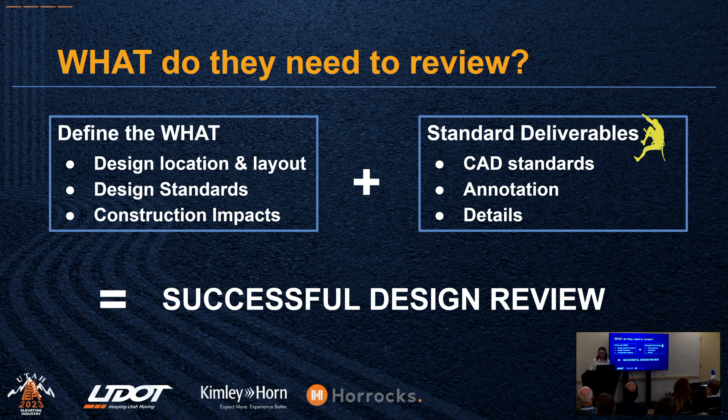And now, as we get into the how for design review, this is where we're going to look at these 4 platforms: the native CAD software, PDF roll plots or scroll plots, 3D review platforms, and GIS. And so Ariel's going to dive into some native CAD software.

Thank you. Yeah, we can clap. Let's clap. Yeah. Okay, thanks, Allie. That was awesome. So like Allie, thank you. She deserves it.

Now we're going to talk about the how. How do we consume the model, view the model, interact with it on a project where we don't have a traditional PDF plan set? And I just want to point out, this is what we've done in Utah so far. These are some things we've tested.

That doesn't mean it's the best way. We might say something didn't work for us, and then you might say, oh my gosh, we're doing that now, and it's amazing. Every agency has different constraints, different needs, so just keep that in mind as we go through this.

Also, most of the demos I'll be showing have to do with Bentley products because we use that most, but we also have done an Autodesk product, and I just want to say Autodesk and Bentley and Esri, that Derek will talk about at the end, have been super supportive and really helpful as vendors as we've tried to work through this process. So I think it's important to take advantage of the vendors. They want to help you. Keep that in mind too.

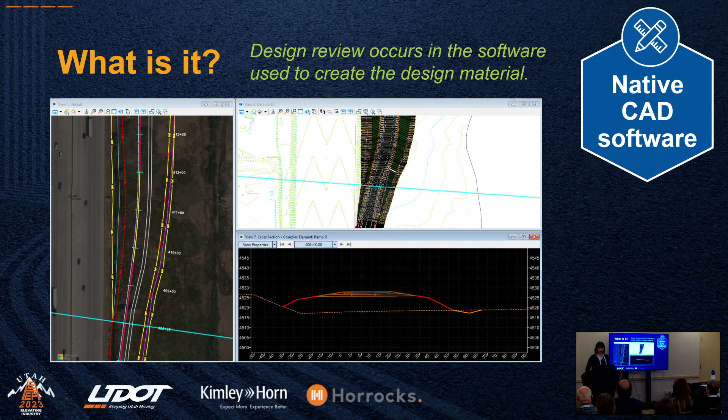So the first one that we'll talk about is native CAD software. This is basically anywhere where the designer is originating design content, data for the project. In this one, it's going to be OpenRoads Designer or MicroStation, but this could be Civil 3D, it could be ProStructures, wherever you're generating the design. Make sure we can get this full screen.

Okay, so first, if you're not familiar with CAD, this is OpenRoads Designer. This is what it looks like, just to get an idea of it. You can see there's a lot going on. There's a bunch of tools. There's a lot of colors, a lot of different things. Top left, I have a 3D view shown.

If you're familiar with CAD, that might look really great. You might be like, oh yeah, I know what's a road, I know what's a pipe. If you're not, you might think it looks like a nightmare. So that will come up on who this works well for. It depends a lot on your background.

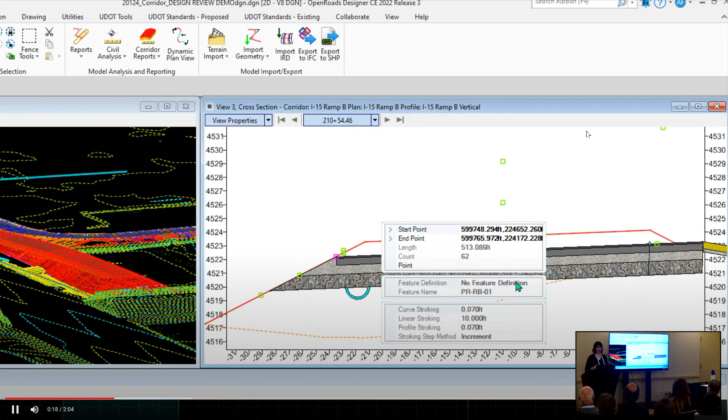Here I've got a cross-section view, so since I'm in the CAD software where the design originated, it's really easy to get different views, to click on things. Here I just clicked on a pipe. I can see the name of the pipe. I can pull a ton of different information. Same thing down at the bottom. I have a vertical center line for a roadway. I can click on that and pull up a bunch of design data on that vertical center line.

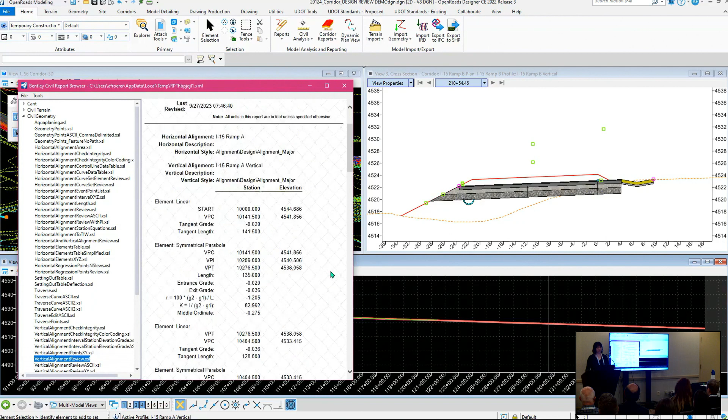So a lot of people might not need this, but there is a ton of data in here and a lot of different options. So this is something that comes in handy typically for the engineer of record, maybe for owner acceptance, QA, QC. All of that data can be really helpful. For a lot of other people, it's not going to matter.

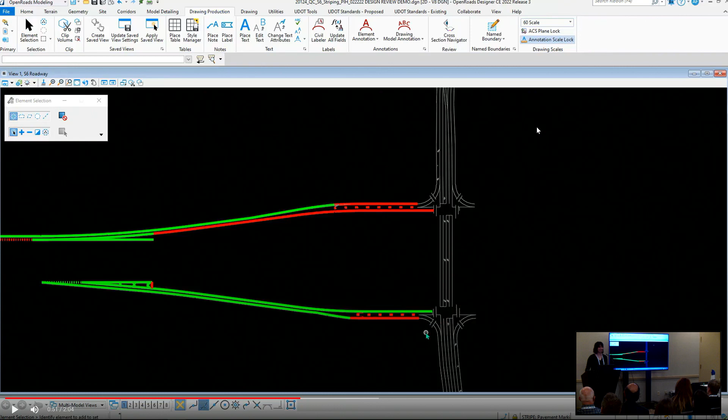A different way that we've used the native CAD software in Utah is specifically for QA/QC and tracking QA/QC through the design process. This is on a project that I think Horrocks and Kimley-Horn have worked on, that Nicole has a presentation on later.

But this is in ORD, a way that we tracked the QA/QC. I zoomed in here to some stripes, you can see we have some colors that turned on. That's something we've set up to indicate what has been checked and what hasn't, based on attached data attributes in ORD or MicroStation, called item types. There's basically a bunch of text attributes that say when something was checked, the date and time, whatever comments were added.

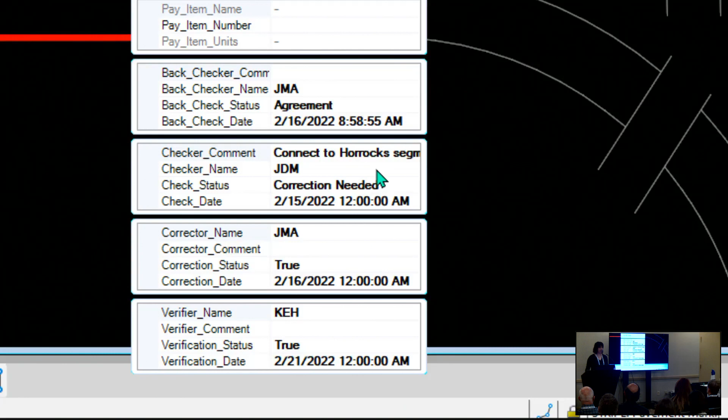So there's a lot of data, and that's up to the designer to manage throughout the project. It can be a little bit tricky once you get into a big project with a lot of files to manage all this, but it's an option.

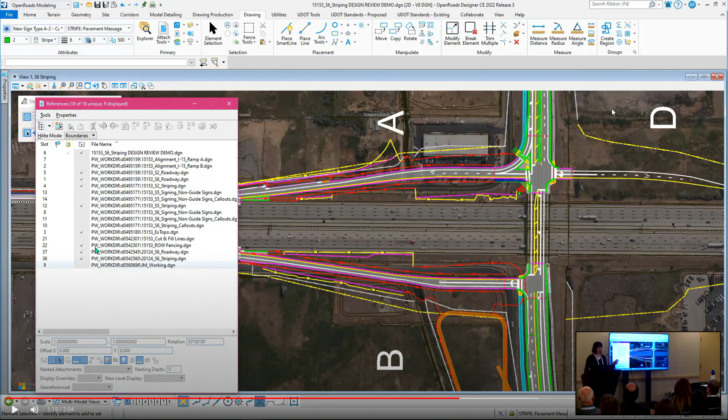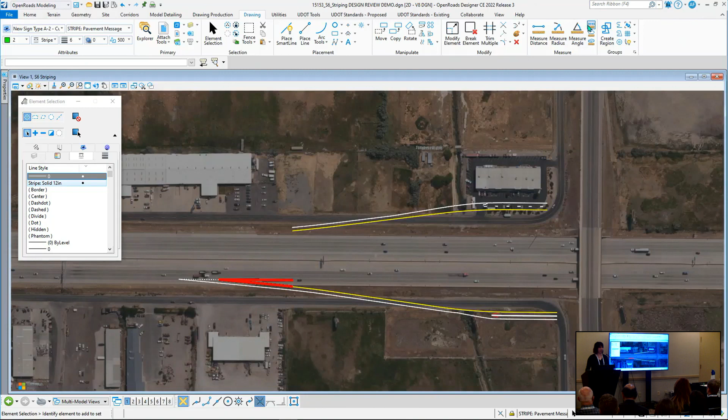The last thing we've been utilizing this native CAD software for is that estimating portion, pretty much the project team estimate, not so much in bidding, but during the design process. It's really easy to customize what you're seeing, pull up anything you need out of the native CAD software. Here I'm filtering down to the one single stripe type I'm interested in, and I can very quickly measure that stripe, see what I have in my file, do this on multiple files, pull pretty much any data that I want.

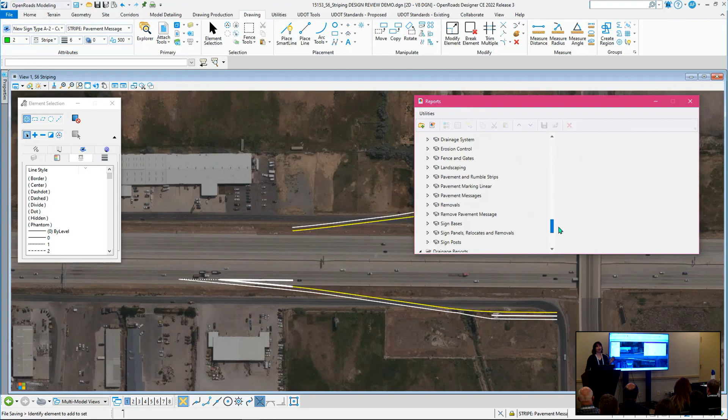We also use reports a lot in OpenRoads Designer in the CAD, and again that's just another way to quickly get a bunch of data. Right now I'm pulling up a striping report that's going to list out the location and all of the data attributes for my pavement marking. So you can see there I've got station offset - it's probably really small, but it's a bunch of data about all the stripes in the file. It's easy to get to if you know what you're doing in CAD.

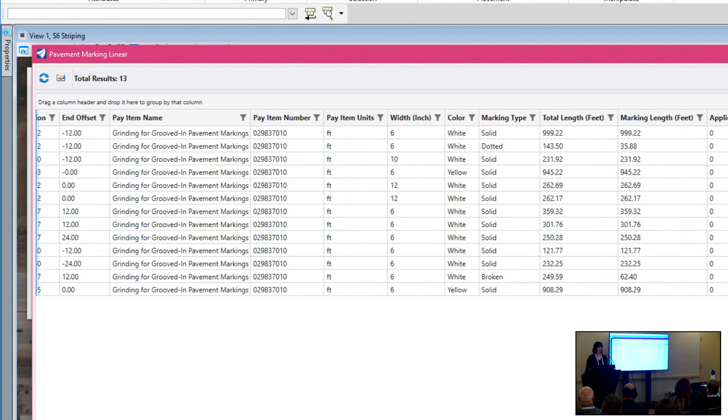Probably gonna have to... there we go. Whoops, and of course I've exited full screen.

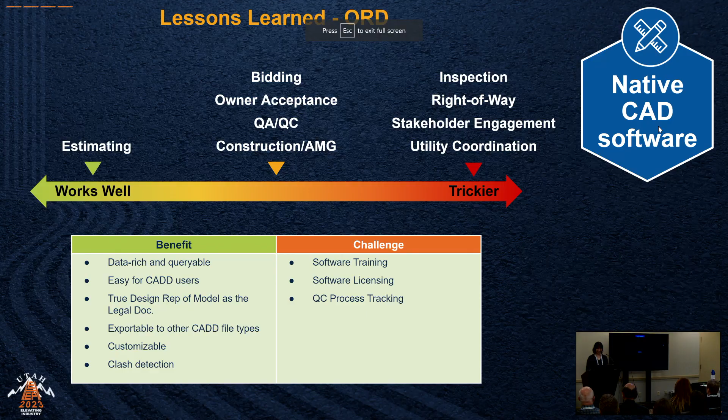There we go. Okay, so on that native CAD software, as you can see, it's complicated. Typically it's pretty expensive relative to like a PDF, and so this works well for anyone who has a CAD background. For third parties, for the contractor, it can be a little bit trickier to get into. It's also, what we use in design is usually not the same software that's used out in construction, so there's usually translation.

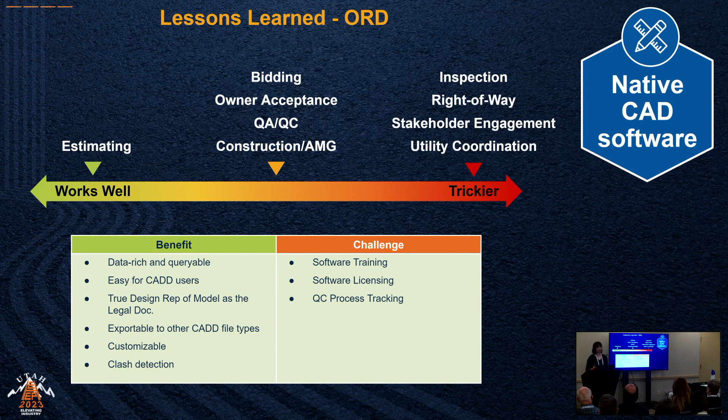So it's not maybe the perfect model for construction, and it's definitely hasn't worked great when we've tried to communicate out to like a utility. Sometimes they'll take CAD files, sometimes they won't, but like the public, this is basically useless - they're not gonna be able to get in there. So that was the native CAD software.

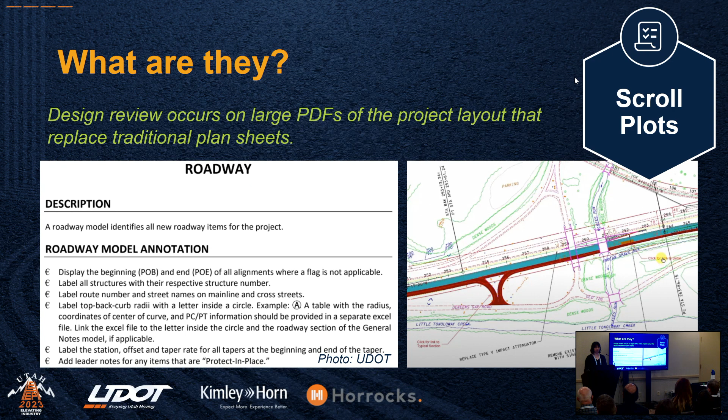The second of the four tools or methods that we've used in Utah pretty regularly on these digital delivery projects is a scroll plot. This is sometimes called a roll plot, but it's basically a giant PDF with the whole project shown, or sometimes just a component of the design shown. How we've used them, we don't put as much information as a typical plan set would have.

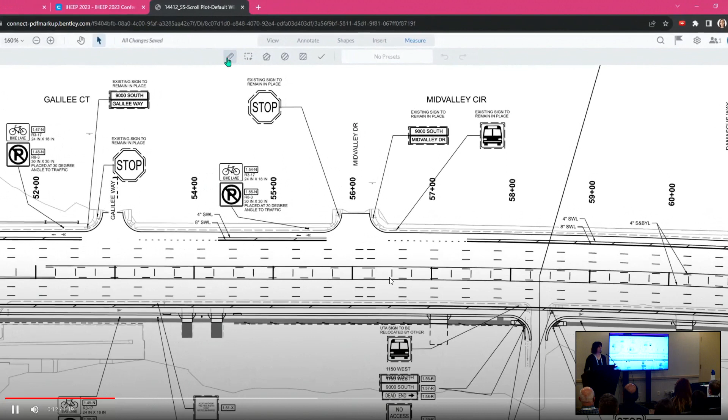So I'm gonna go ahead and jump in and show one that we've used. This is one of our scroll plots from a digital delivery project. Right now I'm in Bentley's Cloud PDF viewer, but basically Adobe, Bluebeam, any PDF viewer is gonna give you pretty similar options. Like all of those other softwares, you can usually measure things just in 2D - you can get areas, point quantities. Here I'm getting a distance.

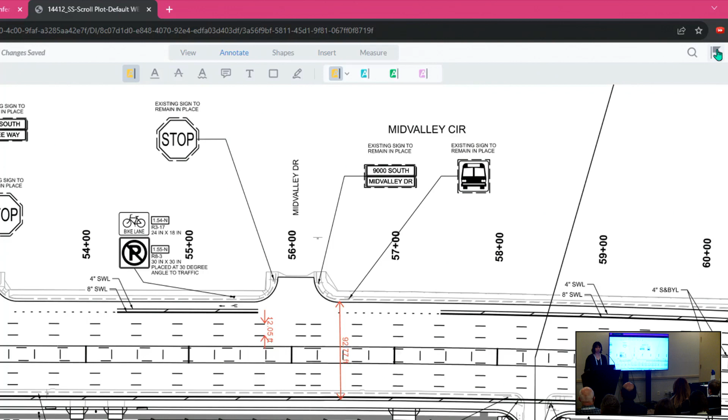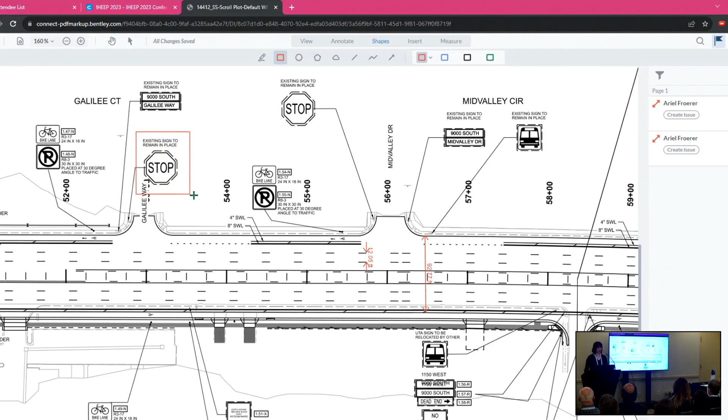So this is also used in bidding pretty often for that 2D data specifically. You also have pretty good options for QA/QC since so many people are familiar with PDFs, and this is pretty close to what we have on a typical project. Usually folks are comfortable coming into a PDF. Here I'm making an issue - most PDF softwares will let you make issues and easily annotate what you're looking at. So that's something folks are familiar with, and having it in this digital format does make it a little bit easier to see the whole project, see all the issues that are happening, and see what other disciplines are up to.

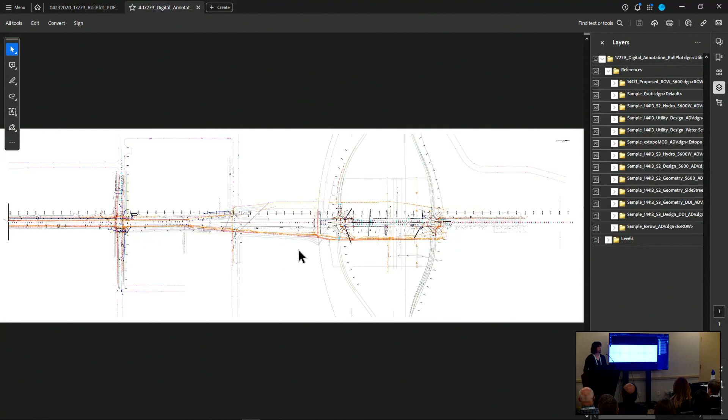This is just one other kind of view of how we've used a scroll plot. This one's a little bit more detailed. You can see it looks a little bit more like CAD. There's colors turned on, there's more information. We also have embedded the layers in this case. So this gives you a little bit more info. You can kind of turn things on and off to customize what you're looking at.

But again, it's just going to be 2D, and there's not really that extra data. If you wanted to click on a pipe or see a pipe profile, that's something that would have to be provided.

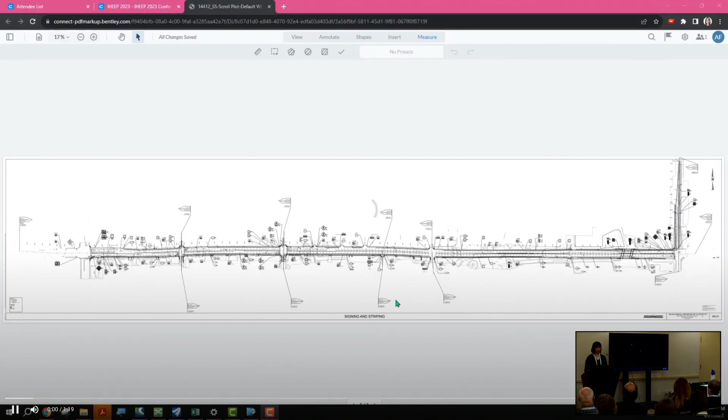So scroll plots, since this is pretty much closest to what we're used to with PDF plan sets, this works great for anyone like right-of-way or utility coordination, since they're used to getting a PDF. We also, on most of our digital delivery projects, are providing these during bidding. That's something that's kind of been requested. We've tried a few times to not have the scroll plots, but so many contractors and subcontractors are used to consuming a PDF that it's just easier to provide some type of PDF. Again, it's usually really stripped down. It doesn't have all the detail we'd have on a traditional project, but it's still available during bidding.

Oh my goodness, sorry, I'm going to have to get water. Okay, I think we'll make it. It's over there, I have water over here. Oh, don't make Allie get it. Oh my goodness, I'm sorry. No, I'll go. Thank you, everyone. Take a moment, take a breath. She's got a few more, so. I can basically run now. I'm good, yeah, okay. Okay, thank you. That's presenter mistake 101. Don't leave your water on the other side of the room.

So on those scroll plots, because it doesn't have that extra data, it's kind of limited on what we can use it for owner acceptance. Some things, like you saw the signing, that's probably enough info. Drainage, a 2D view might not be everything that you need. Lastly, because there's not like earthwork quantities or anything readily available, it's not as great for estimating or that machine guidance.

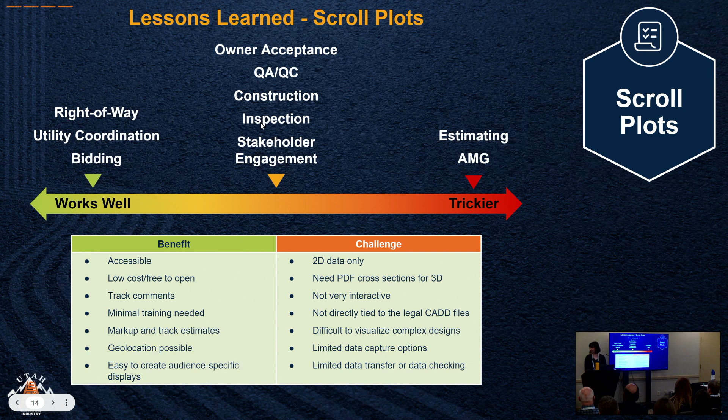So the third and the last one that I'll talk about before passing it to Derek is a 3D review platform. This is basically either like an app or a web app that can pull in or use the project models all at once, but it doesn't actually store the project models, or it stores kind of a version of them, but it's not the original CAD file.

They can also usually hold supporting documents like PDFs. So the ones that we've used mostly are like Bentley's iTwin Review Online. I think that name changes sometimes. Synchro out in the field, and like BIM 360, or I think Autodesk Construction Cloud is kind of the new iteration of that. So this is something where you can view the CAD files, but it's not the original CAD files in their native environment.

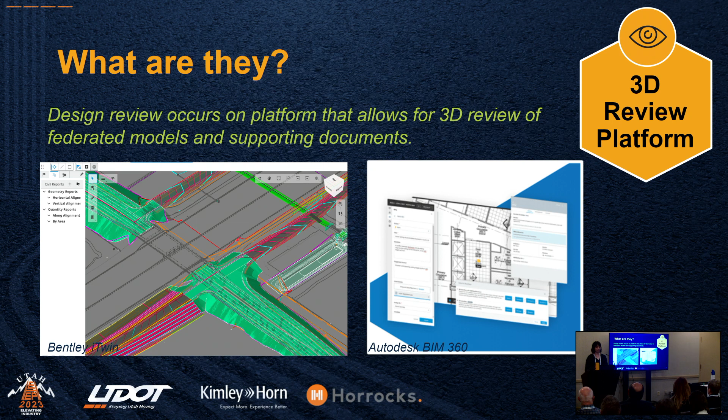Okay, so this that I pulled up here, this is from Bentley's Cloud Design Review that we've used on a couple of projects now. You can see it looks pretty much like CAD. There's a lot of data there. There's 3D data, I've got a cross section. Kind of the big difference between this and the native CAD is I don't have nearly as many tools. There's a lot less that can be done. But that also makes it easier for someone who's not familiar with CAD to kind of come in and learn a little bit faster.

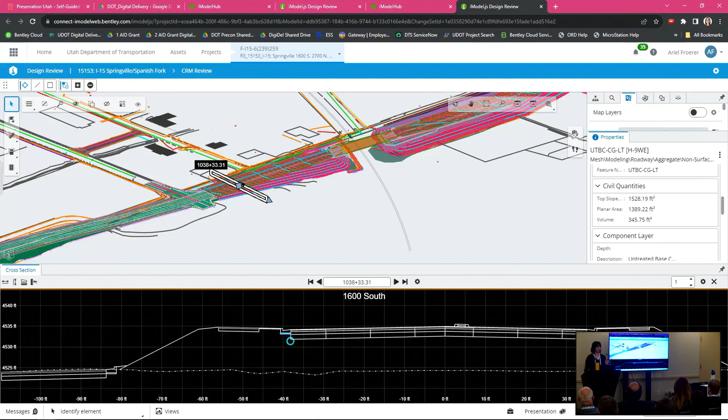You also have the option to kind of click on things. There, it's really small, but I'm just pulling up some project information on a specific element. So you can query the data in here.

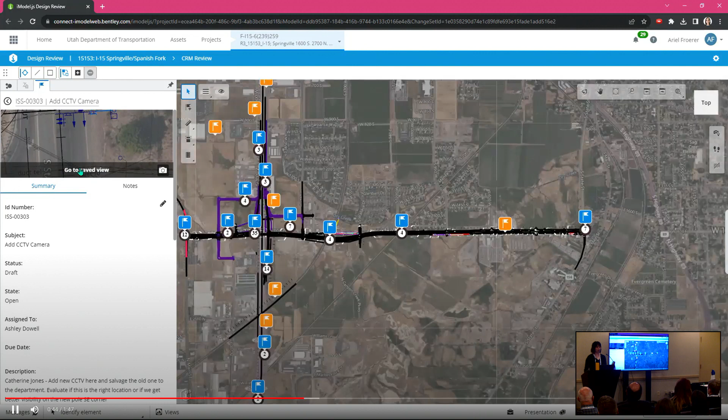And this will jump to the same, this is the same web application, but I'm out in a 2D view. You can see I'm tracking all the project issues, and I can easily see what's happening on the project. So this is pretty helpful for owner acceptance, getting a bunch of people to jump in, look at the project, see what they're concerned about, leave their comments, and then the designers can actually address them. So here, if I click on a specific comment, I can just see exactly what that person was looking at when they made that comment.

This also can be used for QA/QC, although the reason we haven't used it as much for that is it's not the actual CAD file, which on our digital delivery projects is the legal document. So usually the engineer of record at some point wants to look at the actual DGN file and see what they're actually signing, sending out, and stamping their name on.

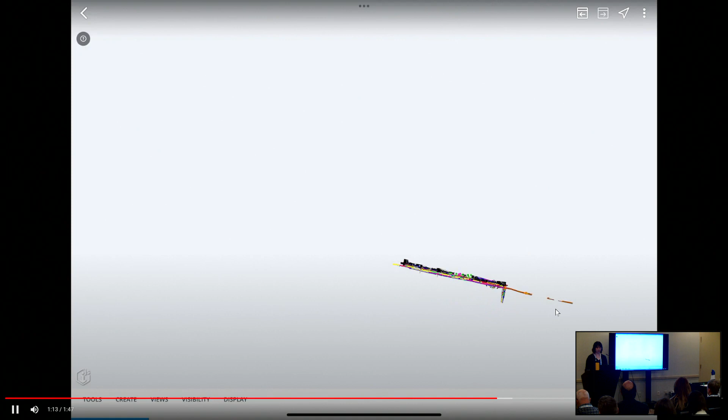This last snip is from Synchro, a Bentley product we're using out in the field. I'm opening a federated project model that contains all of the project files pulled into one place. This is from my iPad, out in the field, so it's more accessible than the browser application. If I zoom in, it's pretty similar to how we've used iTwin—you can see the 3D data.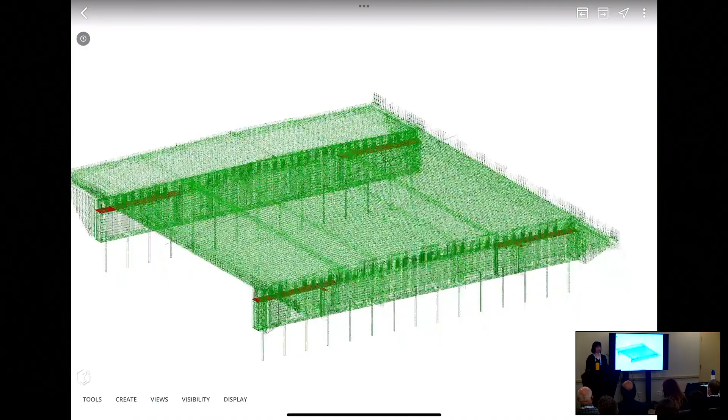One of the big reasons we've been testing this is on our bridge projects. 2D data isn't that helpful for a bridge unless you have a ton of PDF details accompanying it. So here I'm opening one of our bridge projects—this is a rebar view with a ton of stuff in it, basically all the rebar the design team included, laid out for the project. I can see this on my iPad anytime once it's downloaded, and I can click on anything and gather data on the model itself.

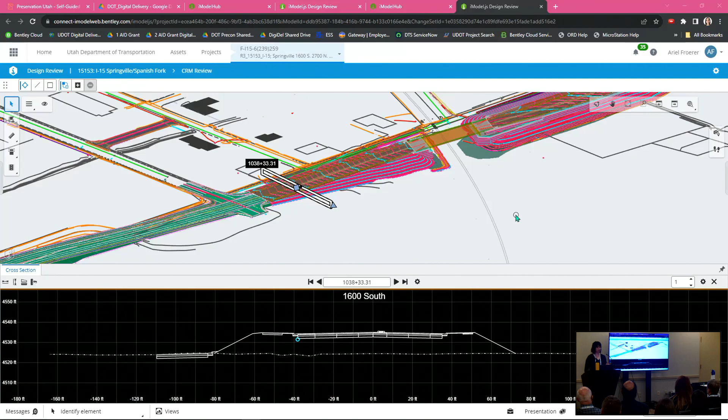This is something we've been testing on a couple different projects, especially ones where we have a structure or something that needs a bit more information.

To wrap up on that 3D review platform—it's pretty good if you need people to jump in, look at the model, and see the project. It works best if people have quite a bit of training, or at least we need to do quite a bit of training. It's definitely easier than CAD, but I think when we first started, we underestimated what it would take to get everyone up to speed who needs to comment on the project. As we've gone along, we've gotten better at having real systemic training and making sure we have people available to help with questions, so anyone who needs to see the project can use it.

We've also provided this, specifically Synchro, during bidding a few times, and I think it's been helpful, but it's definitely a training leap. We're also using it now in construction on projects—we're a couple months in, but it's really come a long way in terms of what contractors are using it for and how comfortable they've gotten with the 3D model.

Most of these still require some access management and some form of licensing. That always varies by product and agency, but it makes things a bit harder if you need to share with a city or just one utility company for a day—you have to figure out how to get that model out to them. It's a little harder than just sending a PDF. So that's pretty much it on this 3D review platform.

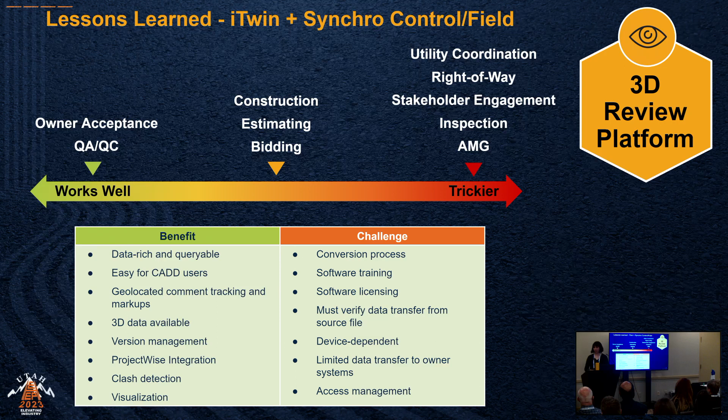We also piloted the use of GIS for some design review. Maybe first a little definition of GIS: it stands for Geographic Information System, not Geographic Information Software. That means it's very extensible and modular. On the back end, it's driven by some type of database; on the front end, it's visualized and analyzed by whatever type of software. So you'll see how that provides some benefits and some drawbacks to what we've done with design review here.

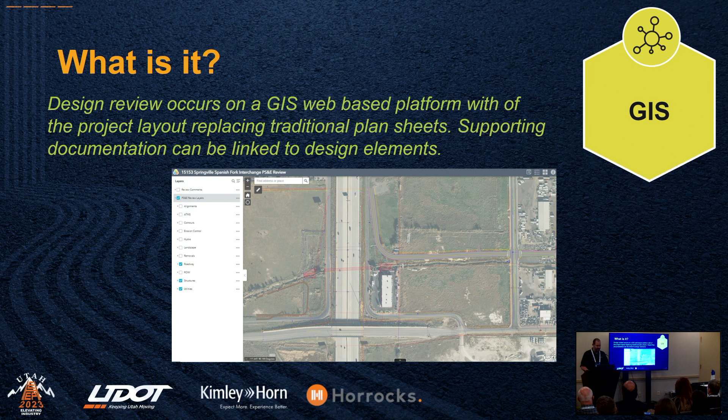We take the model, convert it into a format that a GIS can read, and then we're just going to jump into some live demos—living on the edge here, hope everything works. So this is a map from a project we used for a milestone review. A couple of things about this: first, it was super usable by third parties, so third-party utilities and cities can access it.

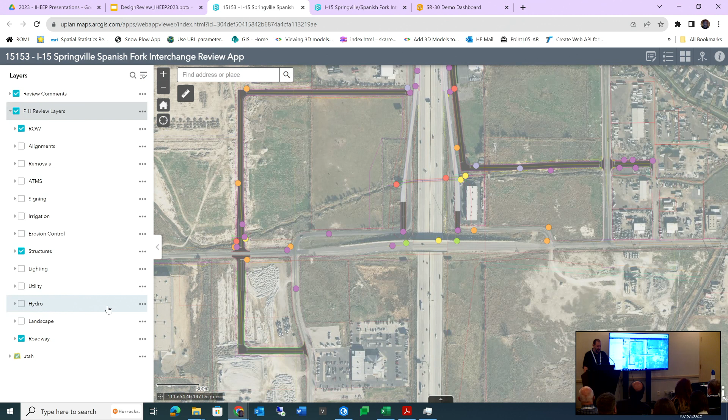Still requires licensing. Everything was locked down. It required a login, but it's kind of run-of-the-mill type stuff to give people access to a GIS web map. On the left, you'll see you have different layers, and then we broke these down by discipline, mostly by CAD drawing as they were found. So you'll see everything in here is two-dimensional.

I just want to put a plug in. There is capability for 3D. We haven't used a lot in this space yet, but we can show a 3D model, especially on the web. So, if we zoom in, we can click on things. We can see the information about, say, this stripe. These are the item types that were put into the model in ORD. So users can come in, they can see the information, they can pull up data about each one of the elements.

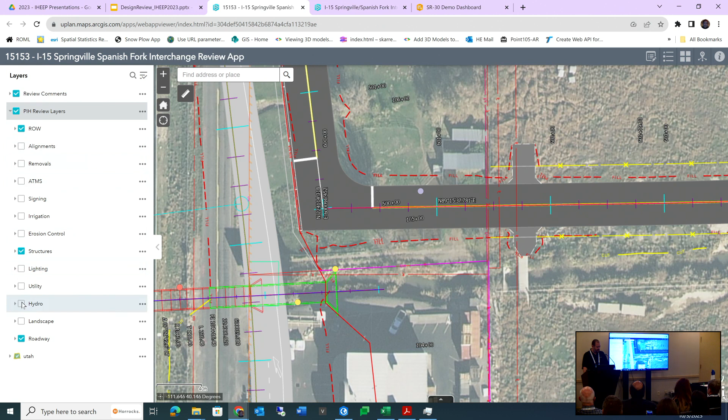Turn layers on and off. I want to see my alignments. There, now I have my stationing, my alignments, and all of my information about that. So these can be turned on, turned off. The one thing that we did here is we made it so that users could add their comments directly into the map. So all of these comments here are categorized so they have colors.

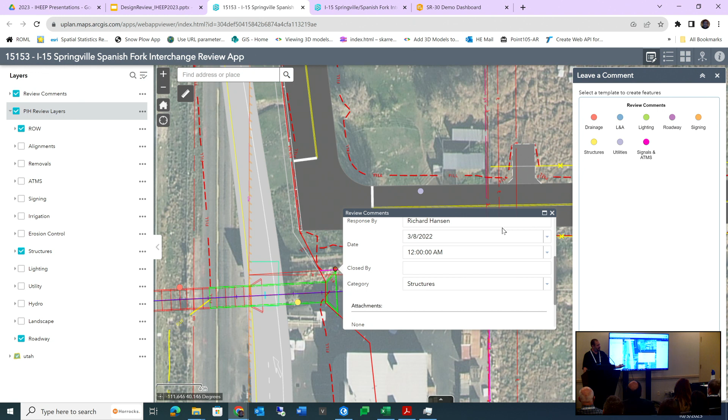That must have been a test or something. That one's utilities. Here, structure needs to be in UDOT right-of-way, so we can track those. And then on the back end, these are also assigned to stationing, so we can push those back over into ORD, and those comments can be addressed. The other thing, everything is in a structured table here as well. So we have a structured table with all the data, super easy to kick that out, and now we have an export of that data to use however we want to use that information.

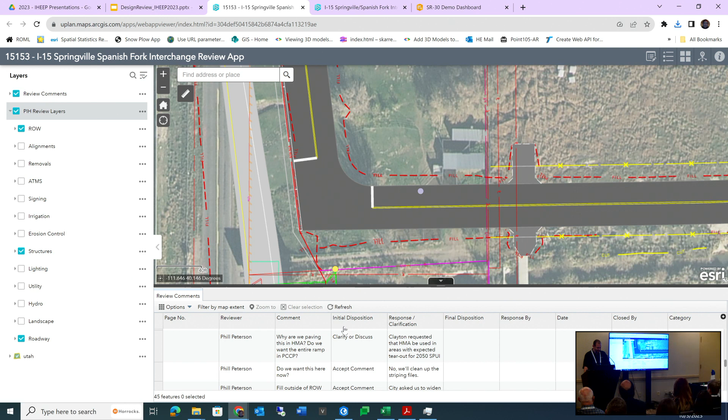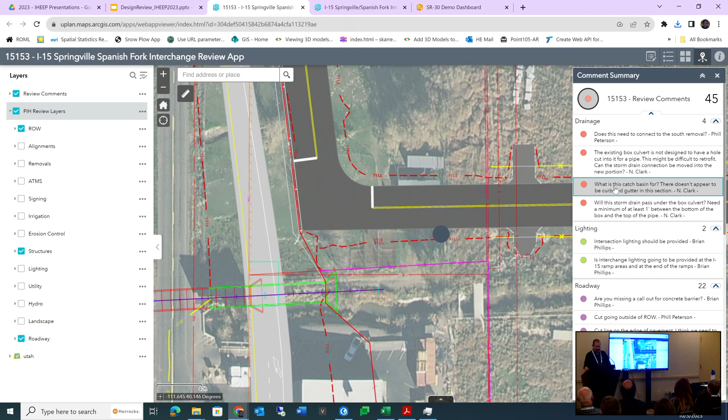The biggest help on this project was actually the help button. I got a lot of phone calls, myself and Zach, so that was the most used button, I think, on the whole project. We could do some things really quickly, 22 comments about roadway, 2 comments about lighting, 4 comments about drainage. Where is that comment? What is that comment? So there's some pretty quick and easy ways to sort through the data and look at the data. And I think this was really useful, especially for, like I said, the cities and the third parties.

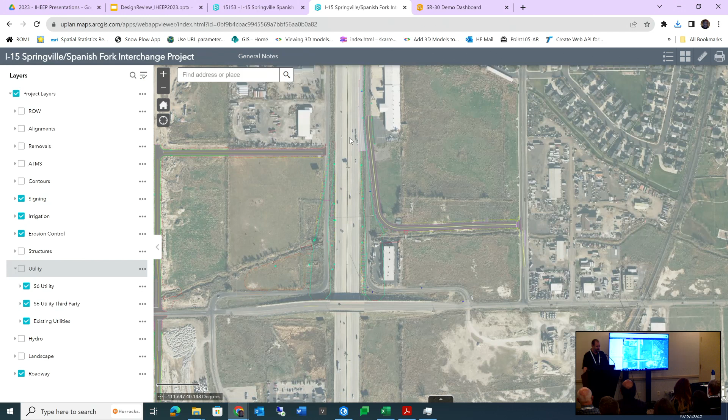And then we took this information and we put it out as a contractor preview. Is that what it was? For the project. So this is a public map. Anybody could go on, take a look. It shows pretty much the same information, other than it doesn't have the ability to comment. So the same information's here. We can come in, turn layers on and off. One thing we added on to this one was contours, to add a little bit of a 3D element.

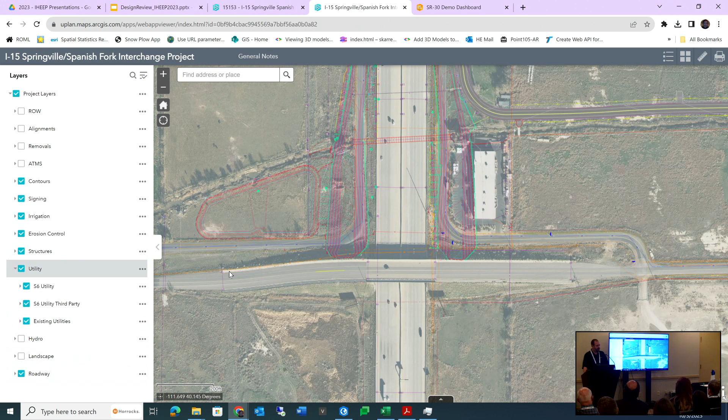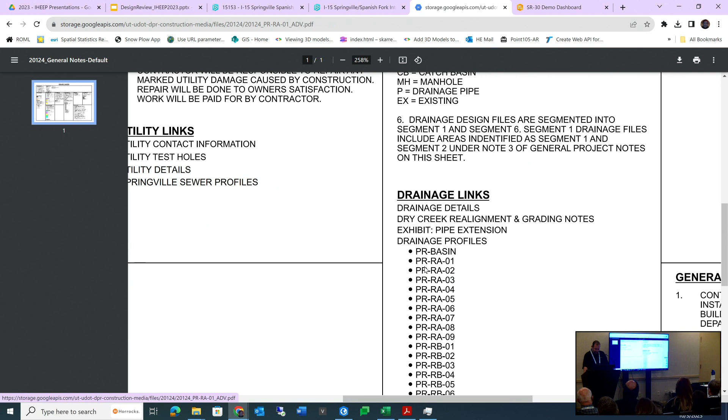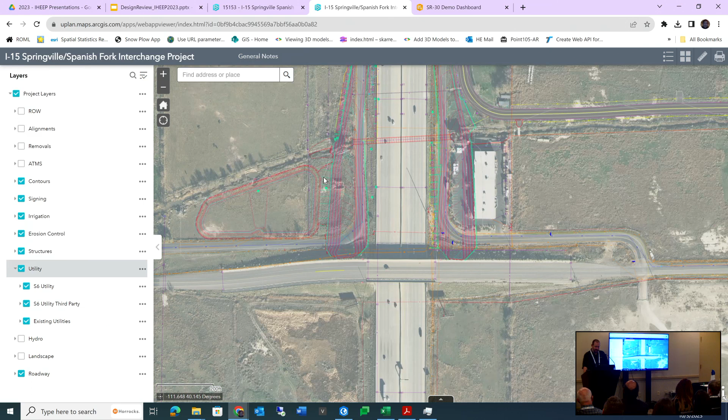We also provided a way to tie it to the general notes. So now we could pull in the general notes, scroll in here, and get details, say for that specific drainage profile. So that was useful as well, to show people. We also set it up, and I know it was used once or twice, I think it was actually this comment map, set up to track your location in the field, so it can be used on site. It'll show a blue dot where you're standing. Went out, looked at some right-of-way stuff and some different drainage things.

Then the next thing is this ports over right into the field. So let me switch. This is where we're going to see if technology is going to work for us. Let's try and switch over to an iPad here.

Maybe. This thing? No? It should be the same source. It's an HDMI. Are you logged in? In your iPad. Oh, I have to do it in the iPad? Yeah. I'm not tech savvy enough to do that. Does anybody know how to do that? I'm not an Apple guy. Try and pull out your Apple connection and then back in. Apple might not have recognized the HDMI was attached to the adapter. No? Okay, we're not going to show it, but we'll talk about how cool it is. Oh yeah, I got to do that. All right. So the nice thing about the field app that we're using is, oh no, now I broke the whole thing. Where's the remote for the TV? You might be able to just find the source button. Huh? Oh. Okay, I'm not going to touch anything.

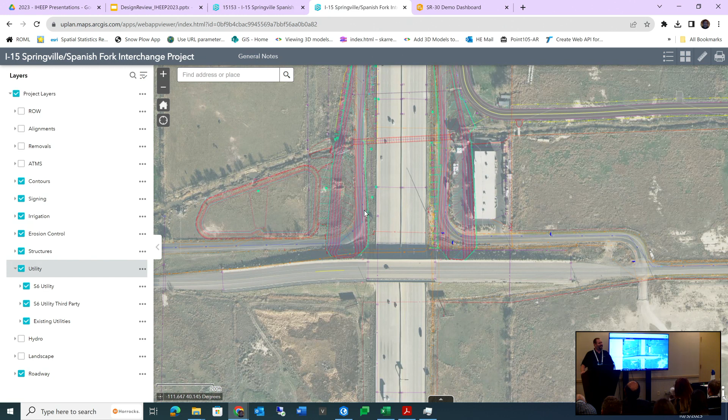So it's a 2D application in the field, but one of the nice things, and I don't think this is really going to show it that well, but let me unfilter. So this is the data that we have coming in from the field.

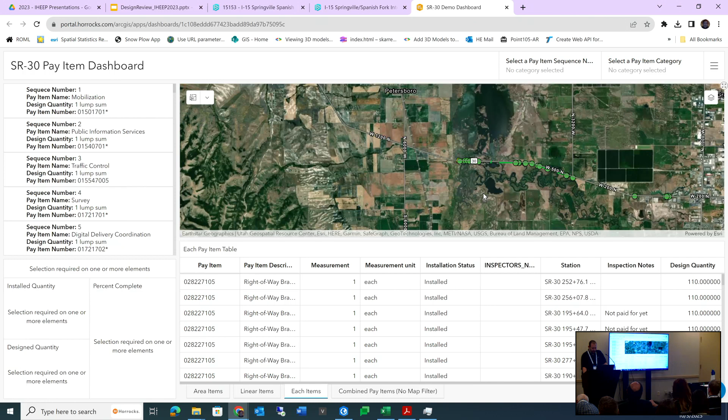For this particular project, this is a live project that's going right now. As things are inspected, they're basically marked up like you would mark a plan set up on the hood of your truck, right? So they're highlighted. So this is fencing here, I believe. So we have some gate posts, we have some fences.

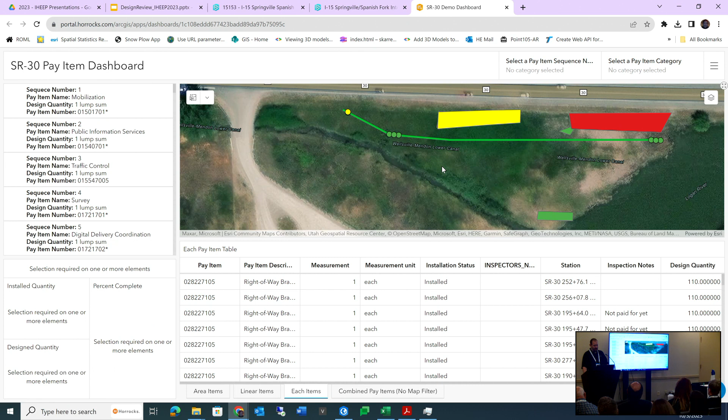And so in the field, the inspectors can go in and say, okay, well, this has been completed, or this is partially completed. I've marked it, but I haven't accepted it for payment yet for whatever reason. And that data feeds back into a central database that we can then use back in the office to take a look at different items. Let me see if,

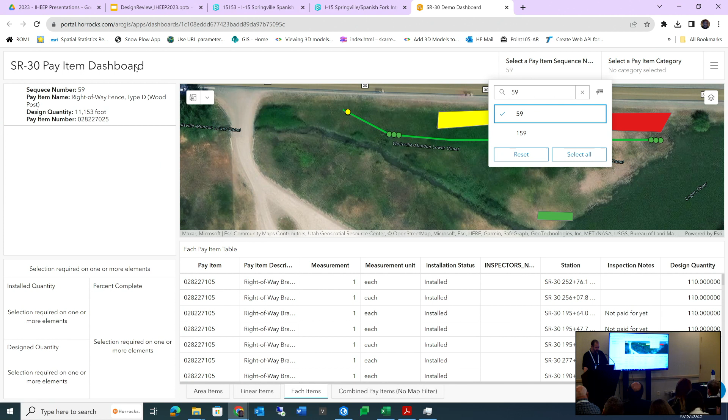59. Yeah, right-of-way fence. So now we can take a look specifically at the right-of-way fence, and we can see, oh, okay, well, we designed 11.2 thousand feet of fence. We've installed 9.8. We're at 88% complete on that specific pay item. Here's all of those different items with their measurements. So we can go back, review these. And so this comes back into the field.

So that's another one of the benefits that we found: once we have that data and they're able to collect that in the field in a structured format, now we can utilize that for different metrics and push that across the enterprise as we go through that.

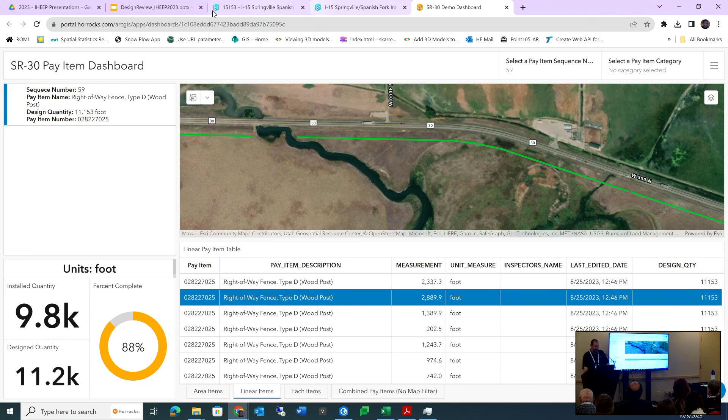Oh, now I gotta show this again.

Some of the benefits really revolve around the ease of use. It's stuff that a lot of people are familiar with. Cities are familiar with a web map. Inspectors, a lot of them are familiar with Field Maps, the Esri software that we use, because they use it for other things, wetland delineation, all these other applications. So they're familiar with the interface and the buttons and how things function. So ease of use is really a big thing.

On the construction bidding side, we're working on a project right now where the contractor is going to start documenting as they build things. The inspectors are documenting it separately, and it gives them a way to reconcile their differences. Right now on that project, the inspector has Field Maps and he pulls up that dashboard and says, well, this is what I've inspected and here's my quantities, and the contractor says, well, I got a spreadsheet and I did 7 of these, but I don't know where they are, right?